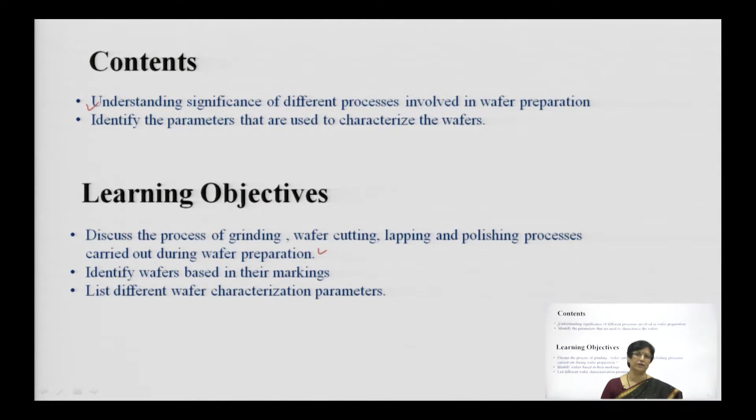Let us first check out that we have already seen the crystal growth process in the second lecture, using Czochralski crystal growth and float zone crystal growth. From sand we first prepared metal grade silicon, pulverized it, then prepared electronic grade silicon, which was molten into the chamber, and then we prepared the single crystal. After that single crystal, whatever stages are involved, right from grinding, slicing, polishing, all those stages have equal importance in the wafer preparation process, and each stage has its own significance and role to play.

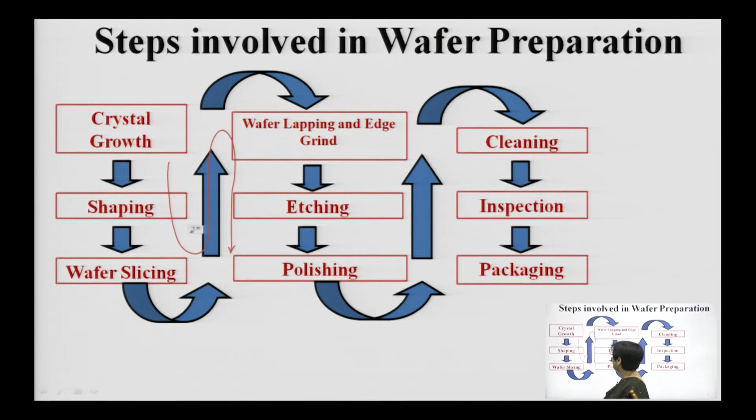So let us check out this process. Stage 1 is wafer shaping. Now you have got the ingot. These days we are able to get ingots as heavy as 300 kgs with diameter up to 300 mm, that is 30 centimeters, and it can be bigger also. Now it is simply like a wooden log. Similar to a sawmill where we grind from the side to remove the scales on the wood, here also we want to grind the edges so that the ingot is properly cylindrical in shape. This grinding is carefully done.

Grinding is carefully done using a diamond cup wheel, a specialized tool which ensures the grinding is uniformly done throughout the ingot as a whole. This grinding has a significant role to play because it is the deciding factor for the final diameter of the wafer. This diameter depends on the grinding shape obtained and the total width of the log.

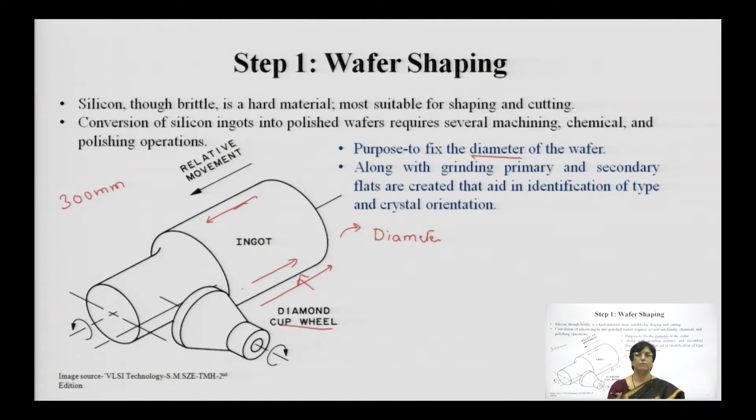Once grinding is done and your ingot is properly made with flat marks, it goes for the next step. Here your ingot is ready. The end where the seed crystal was connected and the end from where it was pulled, those edges we have chopped off. We have made it circular first, fixed its diameter, then made something known as a flat. This flat surface is used for identification. You will have one primary flat and one secondary flat, and depending upon the position of those flats, your wafer will be identified.

Post this grinding process, your wood log is made properly circular, just like a log of wood, and now it is time to cut it into pieces.

When you want to cut it into pieces, the earlier method, from when VLSI technology originated till very recently, used the inner diameter saw. This saw was cutting the wafers into uniform slices, just like chopping a banana. But this has to be done very precisely, because you need a uniform surface, and the substrate has to be properly flat, so there is a lot of precision involved.

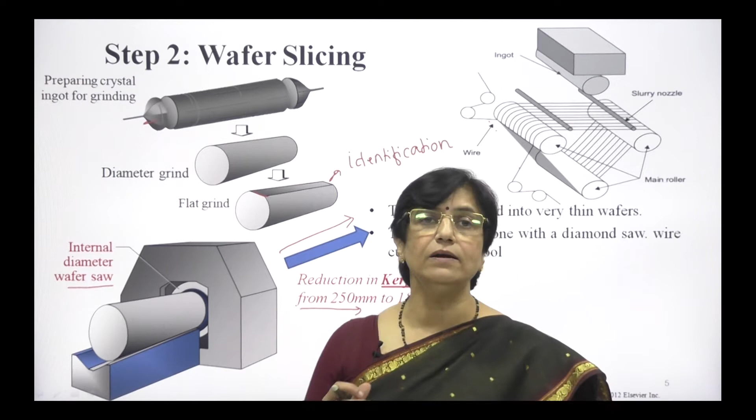Now you have multiple fine wires simultaneously cutting the ingot. You can have 3 ingots cut simultaneously, and the ingot size can go as big as 300 millimeters, meaning a 30 centimeter diameter ingot can be cut at a time. Multiple such ingots can be placed onto the cutting tool, increasing the efficiency of the overall cutting or slicing process.

This is the latest technology used for large scale manufacturing as the demand for silicon wafers increases day by day. Multiple wire cutting tools are used, and this provides a lot of advantages and significance, mainly in minimizing the kerf losses. Not only that, the substrate surface obtained is much superior compared to what we get with the inner diameter cutting saw. So rather than using a saw, we are using a wire to cut those ingots.

Once we get the ingots of uniform size simultaneously cut, these are the first stage in which we are getting the wafers.

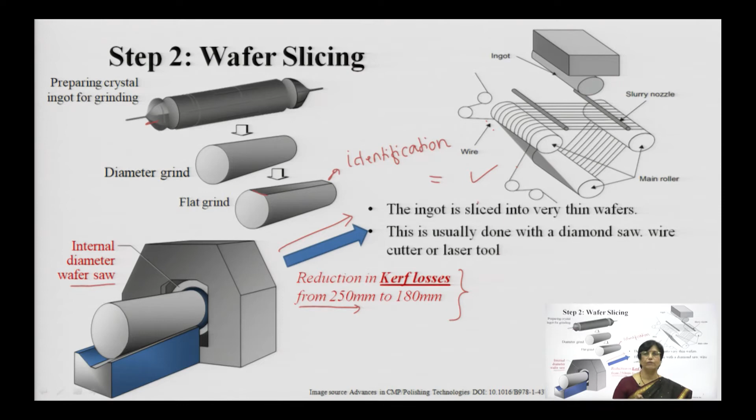Now these are the wafers we are going to get after this process, you have slices available with you. As per the diameter of the ingot, you will have different diameters, like if you have an ingot of 30 centimeter diameter or 12 inches, you have slices of 300mm diameter ready.

Now those slices might not be properly uniform on the substrate, so for that reason we do lapping. What is this lapping? Lapping is, as per literal definition, an abrasive machining process used to obtain materials with high dimensional accuracy and excellent surface finish.

This is nothing but normally whenever we try to soften the surface, you dip it into some slurry or material and coat it with something. Similarly, this is one of the processes where we place the wafers onto stands, which are basically plates holding your individual wafers. There will be some flow of material which works as a lubricant, made up of silica, and that material will be aluminum oxide slurry, and we are trying to dip those wafers and coat them.

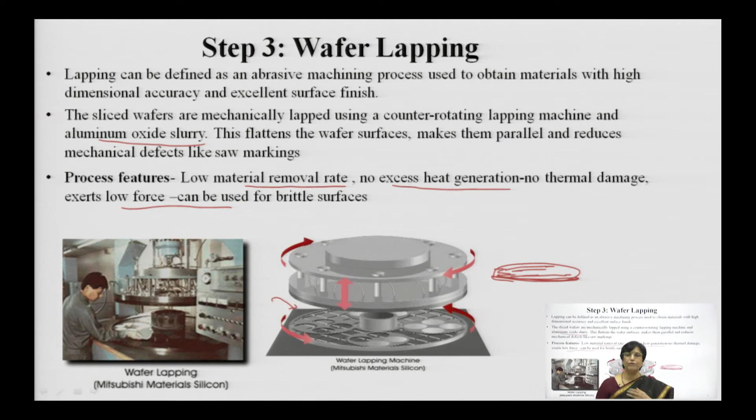So minor abrasive materials can vary from polycrystalline diamond to silicon carbide, or multiple materials can be used for this process. This process is also exhaustively studied, and for different applications, if the material or wafer is very brittle, you tend to use less abrasive material. If the wafer is like silicon, you normally go for aluminum oxide slurry, which is used as a material for lapping.

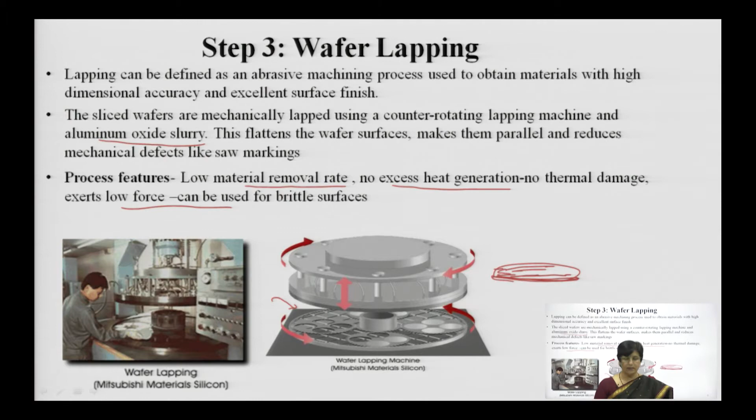You have a lot of material available on the silicon, you need to clean it, and to clean it before going for polishing, we don't want any contamination onto the wafer, and therefore we go for etching.

Now this etching is for a very limited period, because you don't want the wafer to come in contact with chemicals at high temperature or for a longer duration.

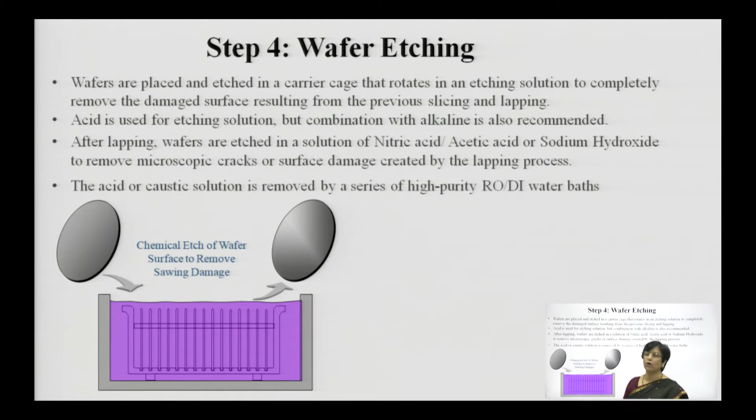We normally use alkali or acidic solution to dissolve impurities that have entered the wafer while handling the machines, since the wafer comes in contact with so many processes that some impurities can get into it. That is why we need to eliminate them.

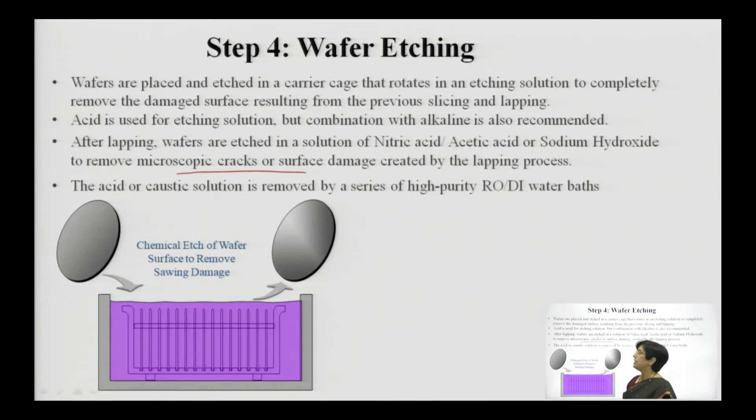After lapping, the wafers are always etched by nitric acid and dissolved in acetic acid or sodium hydroxide to remove microscopic cracks and surface damages. This acid or caustic solution is then removed by deionized water and RO water.

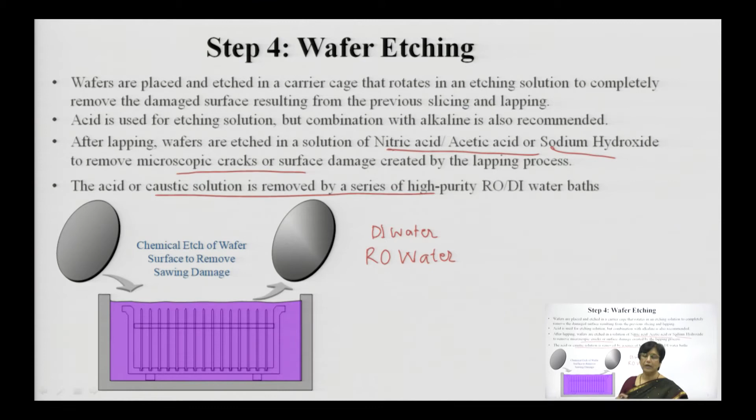Whenever you handle any chemical, post chemical exposure, DI water is essential. You always use DI water or RO water to clean the wafer. With this RO water or DI water, you clean the wafer, and then the wafer is ready for the next process, which is polishing.

After lapping, we have cleaned the wafer, and now it has entered the polishing stage. Polishing is an essential part in wafer preparation, because every wafer must have a mirror shine polish. This is basically done on a polishing pad.

With that you can have two-way polishing or single-way polishing. These days, since technology has advanced, we often prefer double-sided polishing because it simplifies the task. Though it is an expensive affair with additional precautions to be taken, it is always recommended. These days, all industry standards normally go for double-sided polishing.

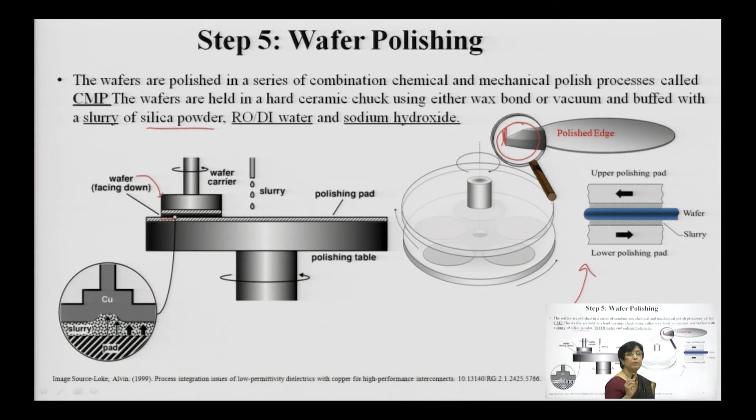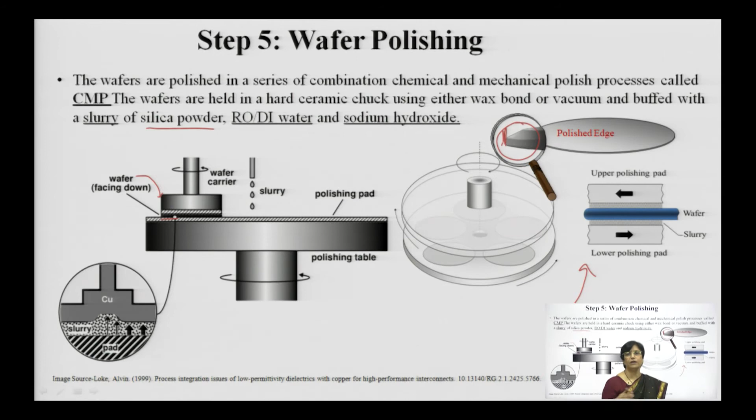These are the two techniques to always remember, and that is how your polished edge will not be at right angle, it will not be sharp, it will be beveled. The polishing, because of the rotating and the slurry, will end up giving a shining wafer with uniform surface, perfect surface, without any inclination, cracking of edges, or irregularities. So this is what polishing is.

Once polishing is done, cleaning happens. Cleaning actually happens after every stage. We saw cleaning once prior to lapping, and post etching after lapping we also cleaned the wafer, and now again we are cleaning it. This is generally called RCA cleaning, performed in 3 stages.

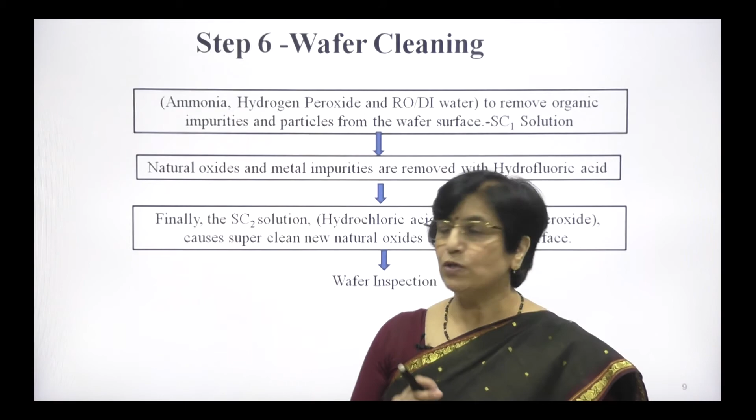What are those 3 stages? The first stage is known as SC1. Under this stage we use ammonia and hydrogen peroxide combined with DI water, deionized or RO water. This will remove impurities and particles from the wafer surface. All the organic impurities react with ammonium hydrogen peroxide and ammonia and get eliminated.

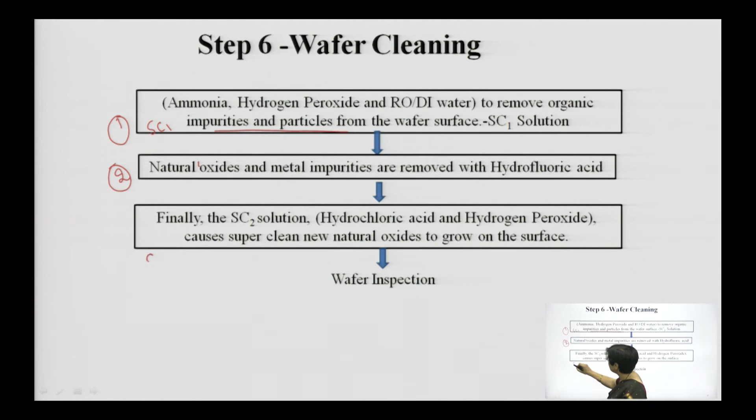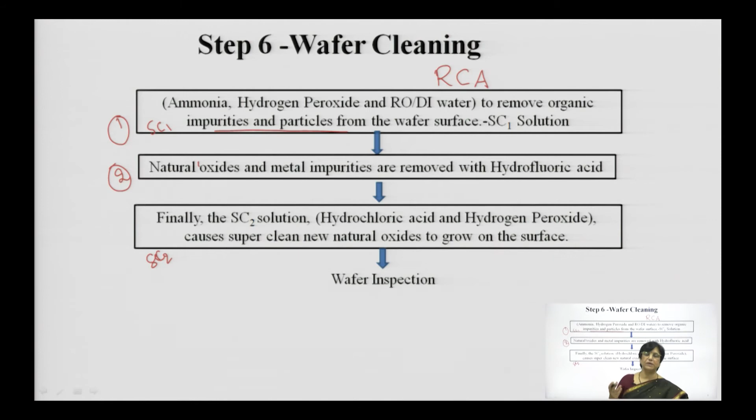In the second stage of cleaning, we eliminate natural oxides and metal impurities with hydrofluoric acid. The third stage is called SC2. This SC2 along with the overall cleaning process is normally called RCA cleaning. It was invented by a company about 40 years back, which patented it and gave its own name to the process, hence it's called RCA cleaning.

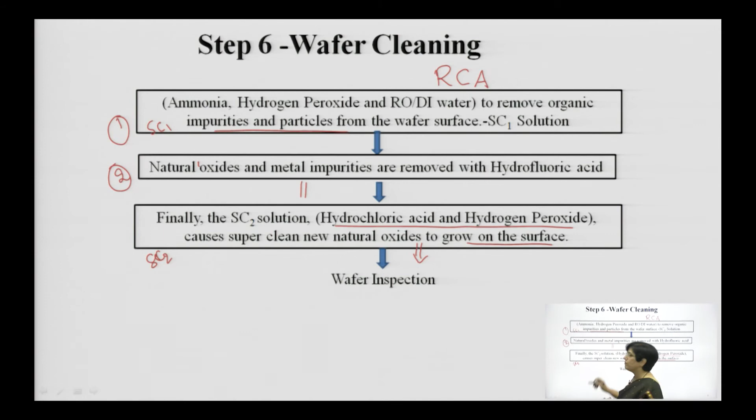This process ends in the third stage by cleaning with a solution of hydrochloric acid and hydrogen peroxide. This removes all oxide impurities, or creates a natural oxide coating on the surface, and whatever other impurities remain are automatically eliminated, and your wafer is ready for inspection.

Why do you need inspection? What all things can go wrong when handling the wafer? The very first thing is during crystal preparation, you can have impurities because of irregularity in the heating gradient, some contamination in the furnace—anything can go wrong and land up as an impurity.

Secondly, during slicing, the shape can turn wrong, chamfered parts can occur, and while chipping the edges can go wrong too, incurring defects into your substrate or wafer. Then in lapping, you may have waviness of the wafer, something we call bow, and other variations. These variations are not wanted.

So you need to inspect the wafer properly. While etching, if metal or chemical impurities are not eliminated, that can create pits onto the surface. So here you need to check nanotopography, micro roughnesses, slurry residues, and wafer strain. During cleaning too, you can have residual particles left on the wafer.

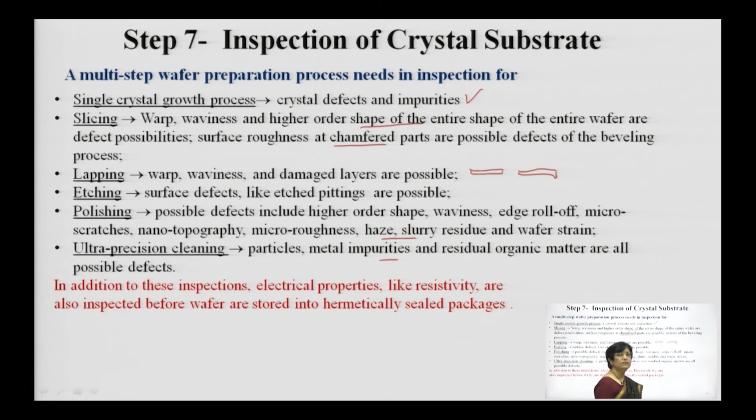Initially we got the single crystal ingot, then we did grinding, then we converted it into slices, then we lapped the wafer to flatten the edges so the faces are parallel, then we carried out wet etching, after which we carried out polishing, and then we went for final wet clean.

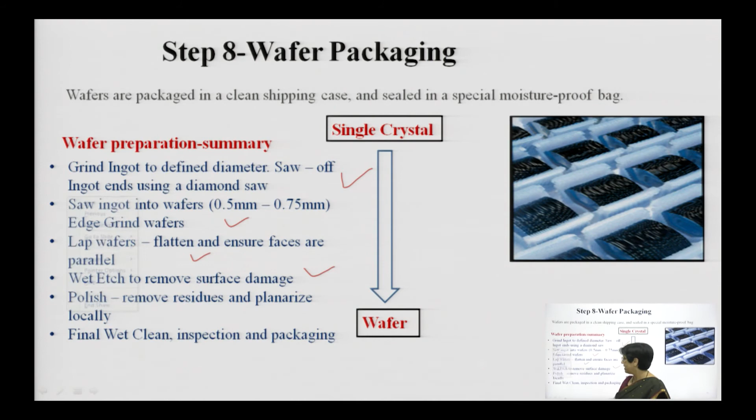Now your wafer is ready and you want to market it, but whenever marketing something, you must know what are the best characteristics or features it has, or what factor decides the quality of my wafer. These are the basic important things which decide the quality of the wafer.

First is the flatness, second is micro roughness, how much oxygen is contained, what are the crystal defects, what particles are present, are there any particles available, and what is the bulk resistivity. These characteristics and parameters can be evaluated based on different processes or techniques which are available. Now, what are those techniques? One by one we will see.

Wafer testing can be carried out using electron beam probing techniques, and one of them is use of the transmission electron microscope. This electron microscope will give you the exact pattern of the orientation of the atoms, because you are focusing a beam of nanometer size, and that nanometer size imaging will be automatically magnified and placed on the fluorescent screen. You will be able to visibly see that and find out everything.

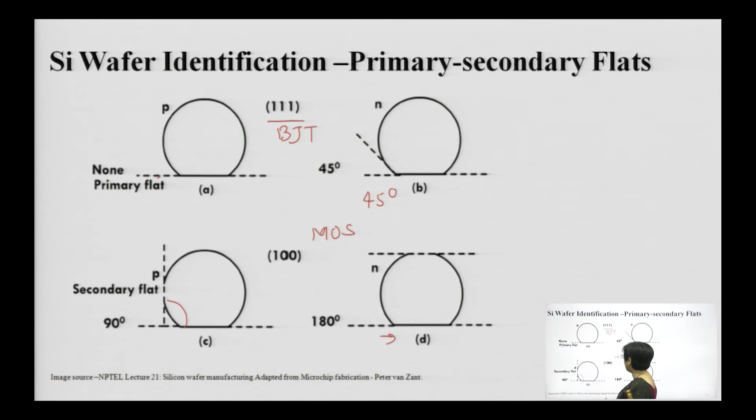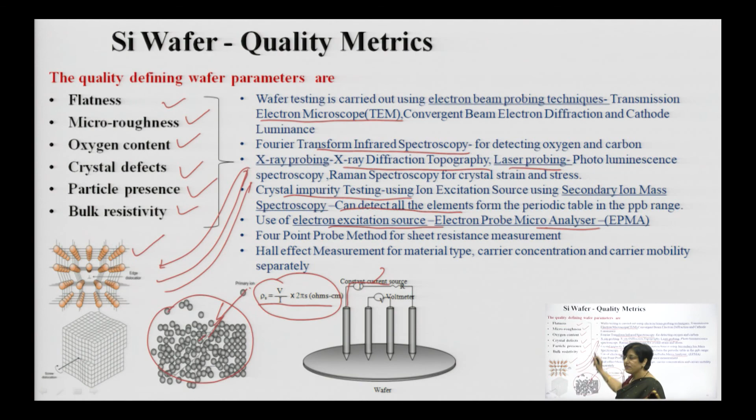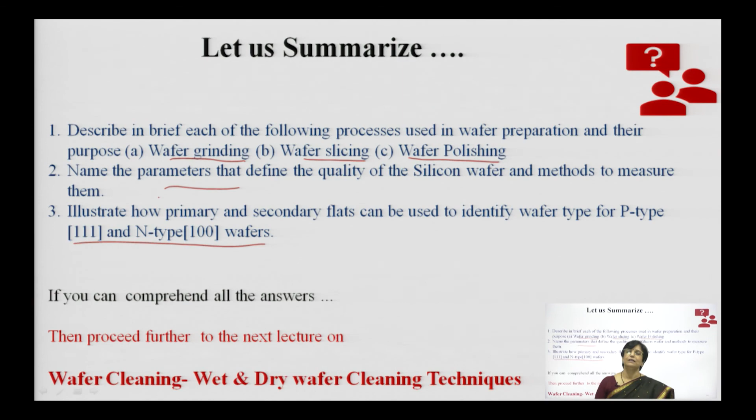So these are the different techniques and methods for identifying the electrical characteristics. Based on these electrical characteristics, if you are able to find out different parameters and identify how they are to be measured, and identify the crystal primary and secondary flats, then we have attained our purpose, and this is where we put an end to this particular lecture.

If you are thorough with this, we will go for the next lecture, which will give you a complete idea on the cleaning technologies, wafer cleaning technologies.